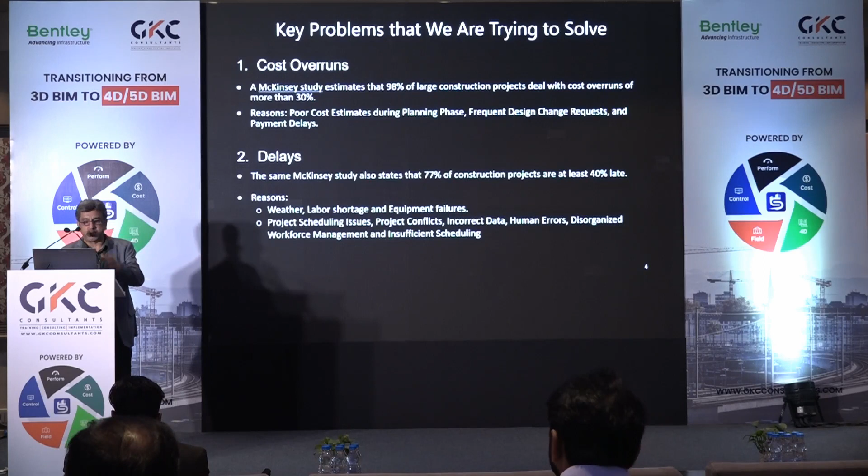Inadequate communication amongst team members, disconnected office and on-site workers, between planning, design and construction teams - this has been a bane of the industry. We are getting there, but it's still a problem we are trying to deal with.

Unrealistic expectations - planners are usually not on the field and are mostly unaware of the actual time being taken on site for all the tasks. They're just getting some data, entering it into a Primavera or an MS Project, and getting done with that.

Teams are uninformed about issues until it's very late, and there is no common data platform for sharing data between stakeholders. There are technologies and people are adapting, but I think we have a way to go there.

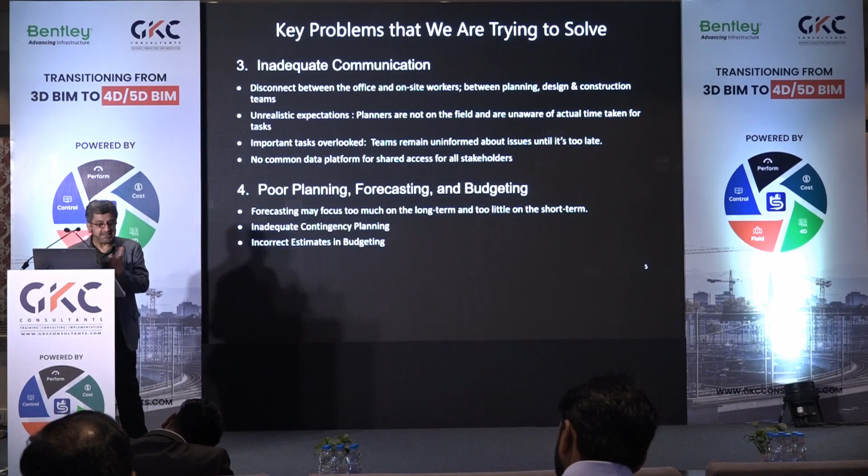Poor planning, forecasting, budgeting. Forecasting may focus too much on the long term, not so much on the short term. Contingency planning is always an issue, and sometimes there are incorrect estimates in budgeting. Labor shortage - COVID obviously has had an impact, and there's a persistent shortage of unskilled labor and also skilled and qualified professionals, civil engineers, architects, etc.

There's a lack of organized document management - what is being seen in most projects is a lot of manual document management, which is inefficient and prone to errors. Digitalization allows for better access, centralizing all important information.

Cash flow is a big problem in terms of how efficiently you are managing your accounts payable and accounts receivable, which impacts your overall project progress. There are modern solutions that can ensure all payments are followed through and accounted for systemically rather than manually.

Finally, I think this is a big problem we're trying to deal with as technology providers - most construction firms or design firms are still hesitant. They're not opposed, but they're hesitant to adopt new technologies, despite all the use cases where people are benefiting. I think that's where we have to drive this whole thing as an ecosystem.

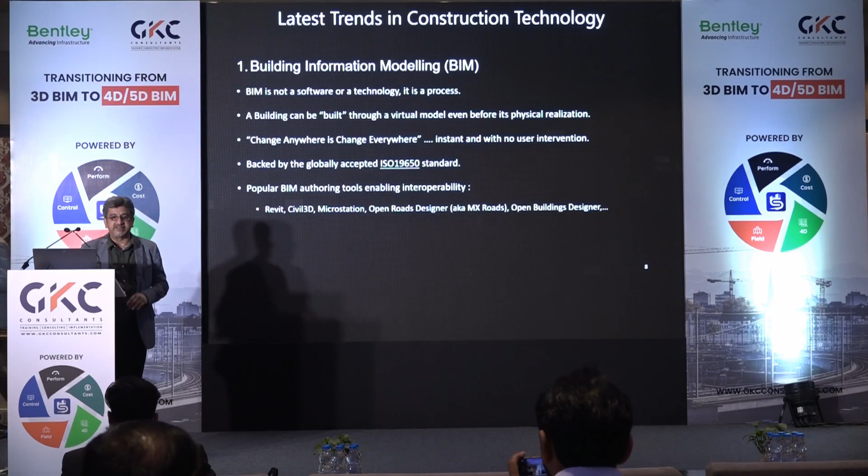UK was one of the first countries in the world to actually come up with a clear BIM strategy, and based on that, the ISO 19650 standards are laid out for BIM, and today most organizations are following this. And of course now we have a lot of popular BIM authoring tools, Autodesk products like Revit, Civil 3D, Bentley products like MicroStation, Open Roads, which was earlier MX Roads, Open Buildings Designer, etc. So now you have a bunch of products which can help you reach the BIM status.

So some of the benefits of BIM: digital integration in terms of helping you streamline and collaborate with different teams and stakeholders, a single platform for visualization. It's a cost-effective platform because you can do clash detection, so you are basically removing the barriers of redesign or finding faults in design while you start the construction. And accessibility to information—basically all the processes are completely coordinated at each stage of the design, so you don't miss out anything, and change management becomes very easy and effective.

Higher productivity, obviously, because if you do all this, you're obviously going to get a higher productivity. So a coordinated BIM model will have all the information regarding every change that you make, which gets reflected across the model. These are some of the benefits. I'm sure there are a lot of other benefits. I just wanted to highlight a few top ones.

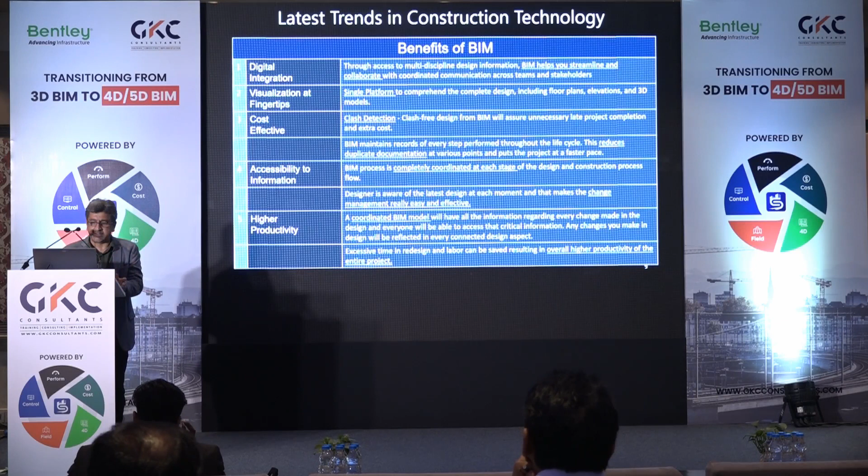The next one, as you transition from BIM to 3D BIM to 4D BIM, is the new technology. Again, not a new technology, almost a decade old now, but essentially it's an effective tool for optimizing the construction process while providing a visual overview for all the stakeholders. This becomes very important as you're able to intuitively see how the project is progressing, matching the models with the Gantt charts, with the resource, the work breakdown schedules, etc., and you're able to actually see that all on one single dashboard. It can be used at different stages of the project, right from pre-bidding to handover.

Obviously, it saves substantial time and cost for on-site and off-site projects. There are many use cases, but one use case I wanted to talk about is a project that Mott MacDonald had done using Synchro-based 4D simulation for a pipeline project in the UK, which saved them a clear 20 days. Now for a project of this size, a 20 days saving means millions of dollars.

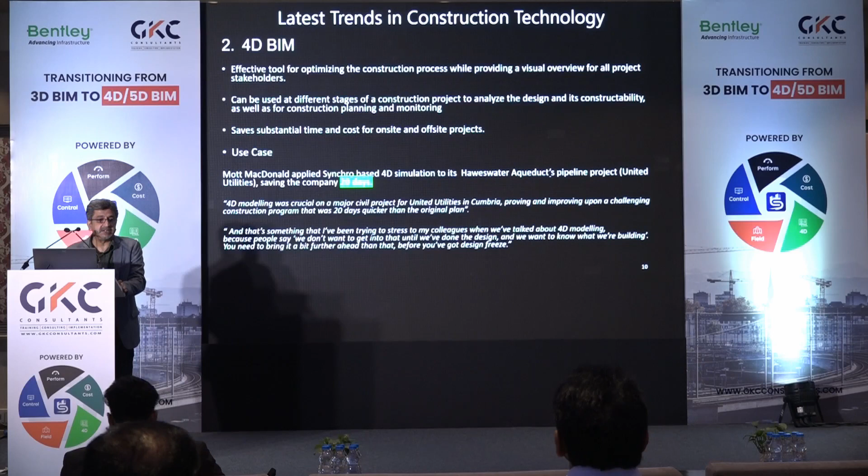So some of the quotes: 4D modeling was crucial on a major civil project for United Utilities in Cumbria, proving and improving upon a challenging construction program that was 20 days quicker than the original plan. And that's something that I've been trying to stress to my colleagues when we have talked about 4D modeling, because people say, we don't want to get into that until we have done the design, which is typically the problem. And we want to know what we're building. You need to bring it a bit further ahead before you actually do a design freeze. These are the inferences that came out of this particular project.

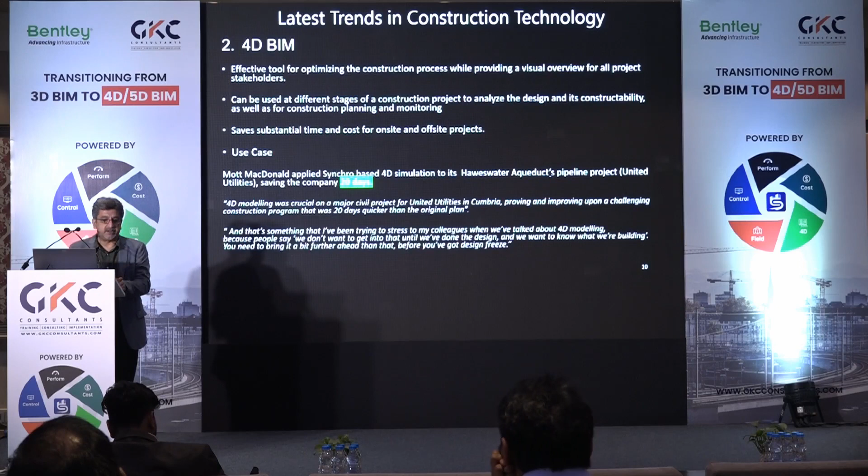Okay, next big technology: digital twin. Again, digital twin is not new. Digital twin has been in the infrastructure sector for about 5 or 6 years. But as a technology, as a process, it's been there ever since Industry 4.0 came to the market, which essentially started with the manufacturing sector.

You can go back as far as 1999, when the first full digital model of the Boeing 777 was created, and a digital prototype was created. That was the first instance of a typical digital model, digital twin. Of course, then it was adopted by large factories. Now we are seeing this being adopted by large construction projects, be it in heavy civil, real estate, and so on.

So what is a digital twin? Essentially, it's a virtual model designed to accurately reflect a physical object. So you have a physical space, data goes from there into the virtual space, and you have the actual data coming back as information into physical space. So you're able to visualize and manage the project much better as you move from design to construction stage.

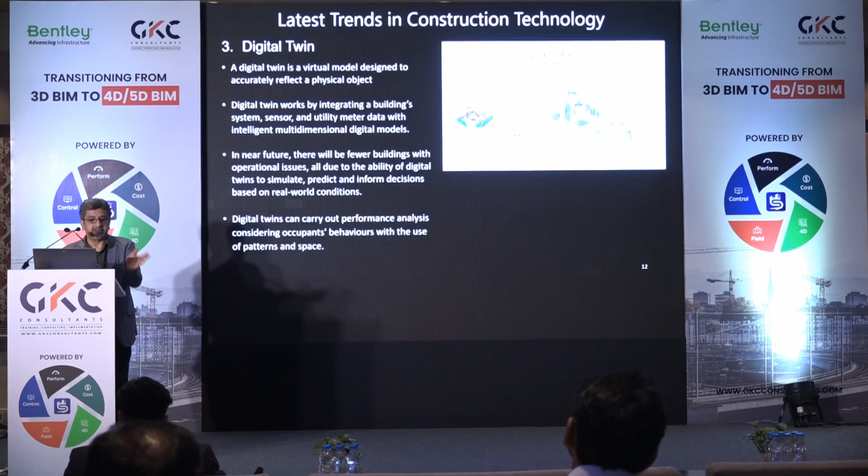You can also do performance analysis. So for example, with all the issues about pollution control, sustainability, etc., this could be very, very useful because you are able to control the parameters for managing the performance of the buildings or the infrastructure, as the case may be.

The fourth big trend now is drone. Again, drone is not a new technology. It's been there for more than a decade now. In India itself, it's been there for almost 8 to 10 years. There are major players. But so far, what I've seen is drone technology is being used mostly in large-scale infrastructure projects or defense.

And of course, you keep hearing this news every day for all the wrong reasons, for drones carrying explosives and ammunitions which come from the border across to India. But that's not what I'm talking about here. I am talking about drones as a technology for essentially being able to capture data better, which can be used in your design and construction phase for infrastructure projects.

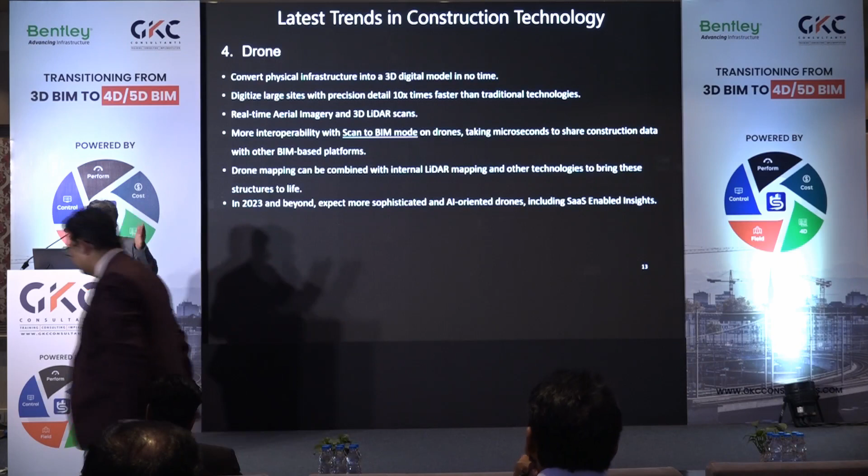So you are able to create a 3D digital model from all the drone data that you capture. Basically, high-speed cameras are loaded and you are able to do it very fast compared to a typical survey method or even aerial survey or LiDAR, etc. Of course, LiDARs are now available on drones also. So you're able to create a 3D model very quickly, typically almost 10x faster in terms of time and therefore cost.

Just to give you an example, maybe a little variation, but nonetheless, I could do a drone survey of a 20-kilometer road stretch, which could be a 6-lane or 8-lane highway, and I could do it in about 3 to 4 days, turn around the data, give it to you in 48 hours. So we are talking about a week. Whereas if I were to do a traditional survey or even using mobile vehicles for survey, it will take at least 15 days or more.

So you're able to get real-time imagery and 3D LiDAR scans, and you can also use 3D scan to BIM mode on drones, so that's an additional thing on drones. And in 2023, as we speak now, you can expect more sophisticated and AI-oriented drones, including SaaS or cloud-enabled insights and analytics that you can get using the drone data.

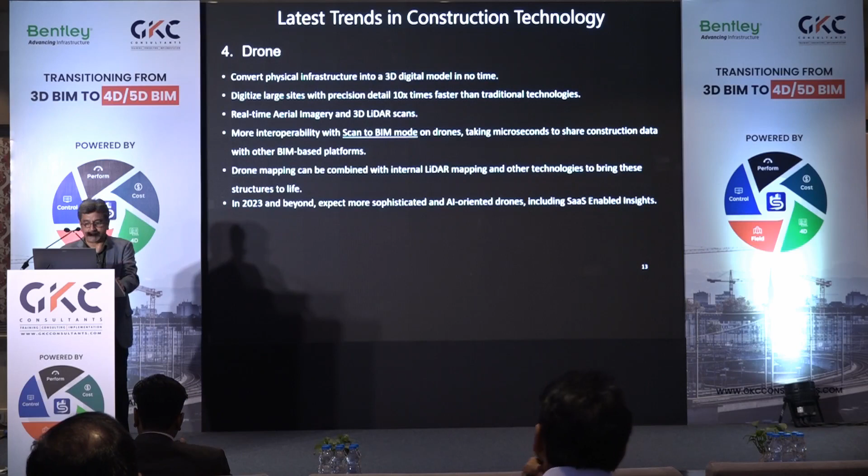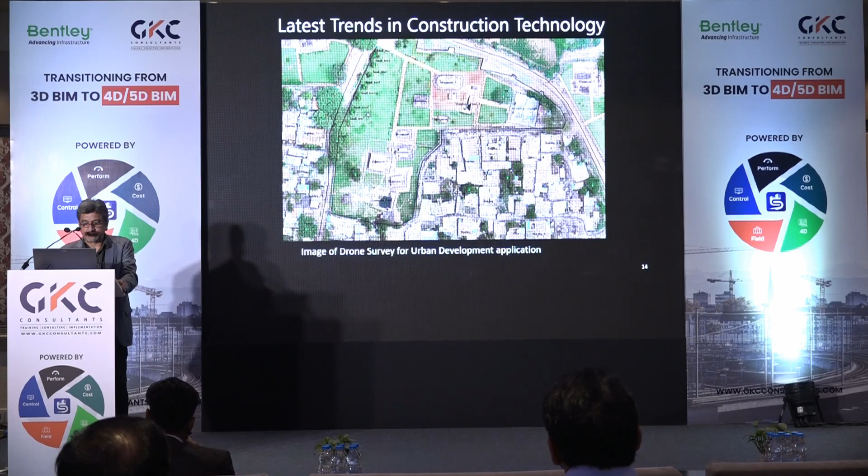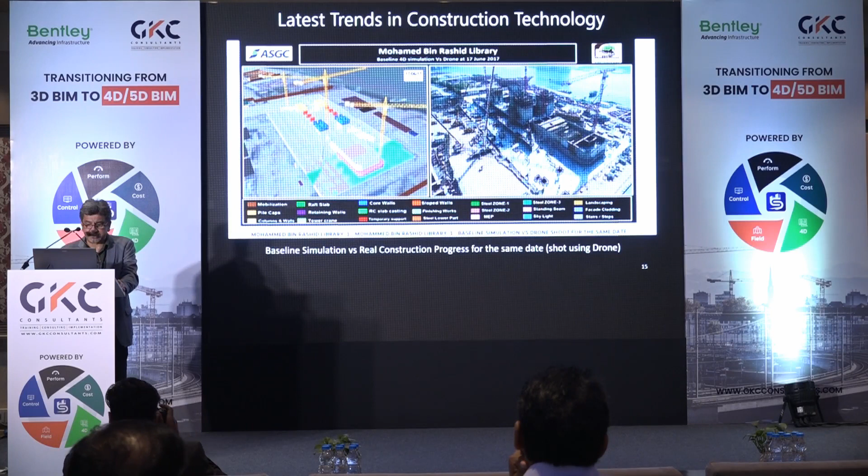Fifth big trend is 3D laser scanning. Again, not a very old, not a very new technology. It has been there for quite some time. Very popular in the plant and oil and gas sector, but now catching up in infrastructure, civil infrastructure sector.

It can be deployed for on-site survey, reality capture of existing conditions, construction inspection and verification, safety inspection, design engineering, 2D and 3D laser mapping, prefab and clash detection. So it pretty much covers everything, except that it's a little expensive at this point. In-plant infrastructure could be a real use case for this. Very high accuracy and precision, and most importantly, the data that you get from 3D laser scanning can be fed into 3D authoring tools for either forward or reverse engineering, for as-built reverse engineering, or new forward engineering.

A use case, a hospital in France, they used Faro, a very well-known brand of 3D laser scanner, along with scan-to-BIM to capture every feature of the existing hospital, and a new model was generated for renovation, a very typical use case.

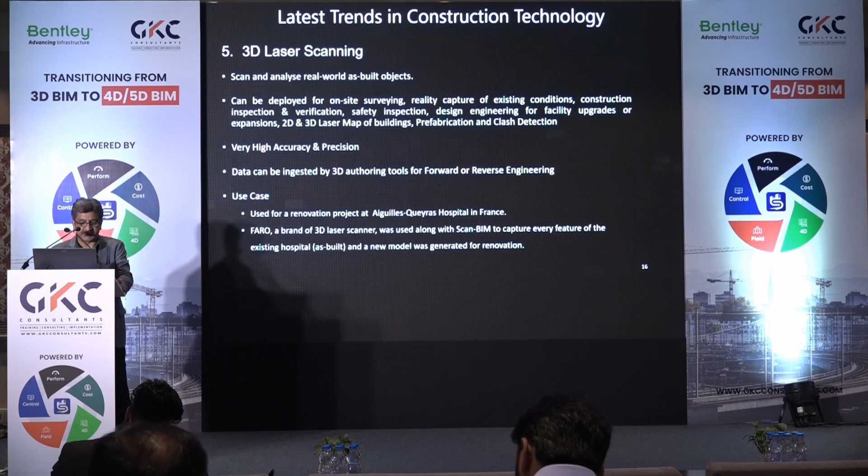The sixth big trend is AI and IoT. I have a colleague from RICS, Dr. Vijay, so he will do a deep dive, so I don't want to steal his thunder.

But nonetheless, a quick word: IoT devices collect massive amounts of data which can be integrated into dashboards, so contractors can easily visualize and forecast construction progress, productivity and cost in an integrated manner. AI-powered software applications can analyze these IoT inputs to provide real-time insights. You can connect live data feeds from IoT sensors to BIM and digital twins and leverage that information to create forecasting schedules and cost models. IoT devices can also report on changes in materials and environmental conditions.

Integrated digital delivery as a concept started way back in mid-2000, and today we are actually seeing it happening. This is where you see a lot of interoperability between different IoT devices, IoT ecosystems, and technologies like BIM, digital twin, and cloud computing in the near future. So that's where the entire integration is happening.

We keep hearing this, virtual and augmented reality, or AR and VR. It's a very large business, almost $8 trillion is the global forecast, and they are promising to reduce building cost by 90%. It can enable remote site inspection, especially where sites are difficult to get to, and it enables safety, collaboration, and communication amongst the various teams.

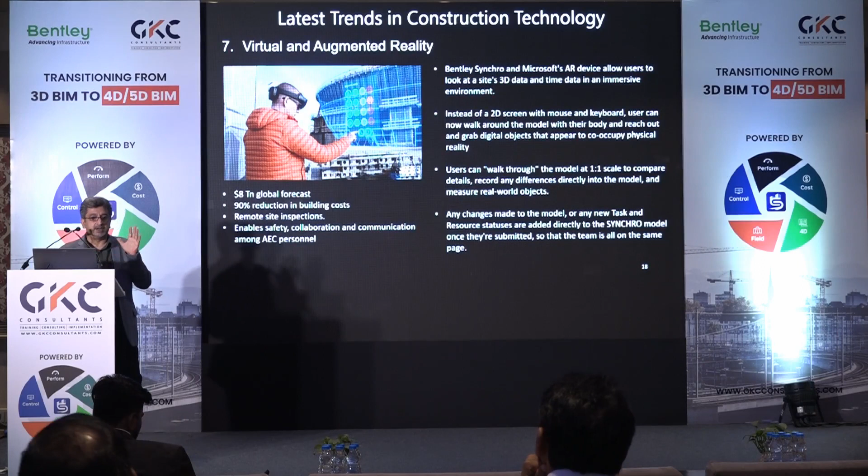But a word of caution: HoloLens is still in its infancy from an equipment standpoint in India. Yet to get there, but probably in the next 2-3 years, it will definitely be available.

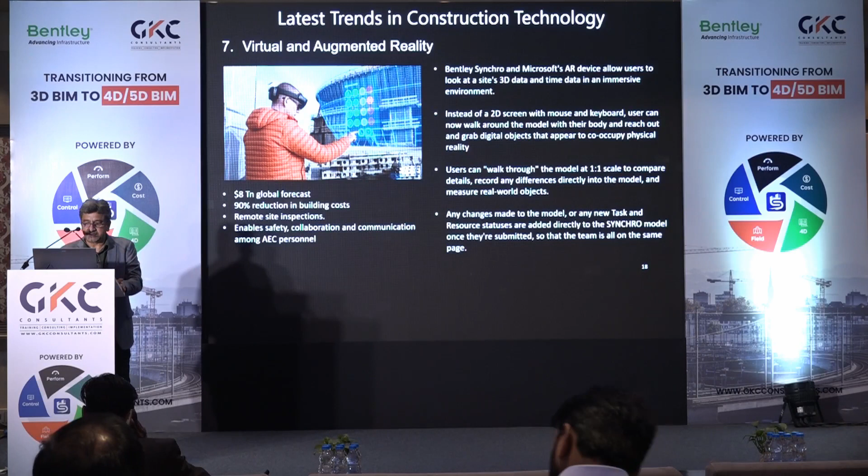Thanks for your patience. Thank you, Dada. Just please, Dada. So I would like to invite Dr.

Shumank, he's an IIT research fellow, to give a small token of appreciation, Dada, for you. Please. Yes.